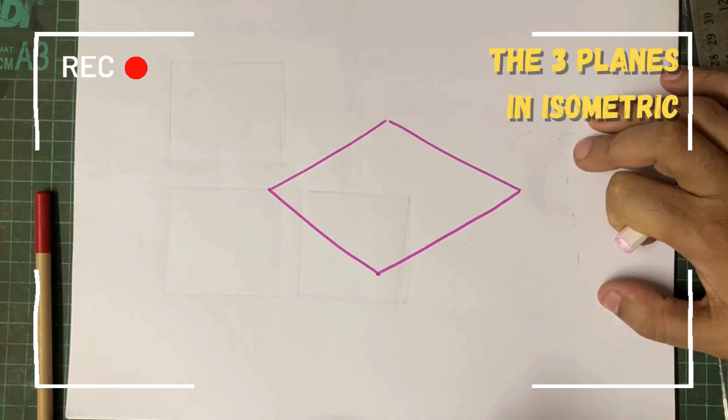But as mentioned to you in earlier stages as well, you are still seeing the faces of your product. So 2D face, 2D face, 2D face. However, as soon as you are looking at the three planes, but in isometric, what will happen is that the same thing will be shown like this. So we're going to make the top view, but we are going to make the top view like that. So anything that you're seeing, if this was the base, then that is how you're going to look at a top view.

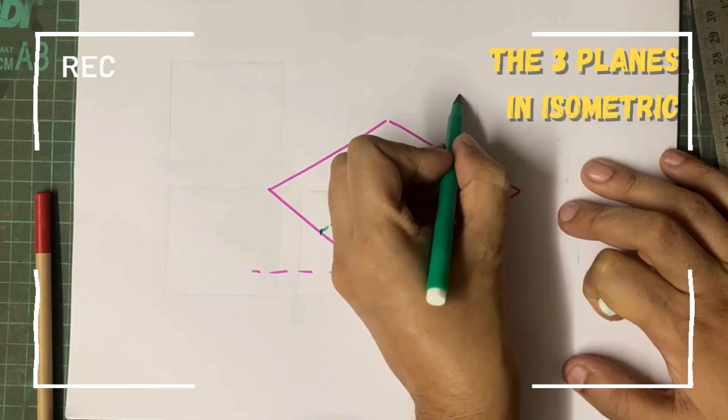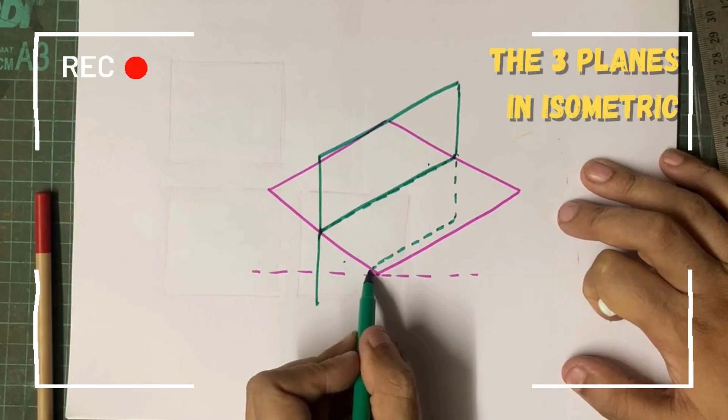So what will happen when we have to look at a side view? Now, side view means, unless specified, this is the side view, which means to look from here, I will need to make a plane which will come over, and that's actually hidden. This one won't be hidden, so let's make it like a proper line, and this will be here. So that's a side view for you.

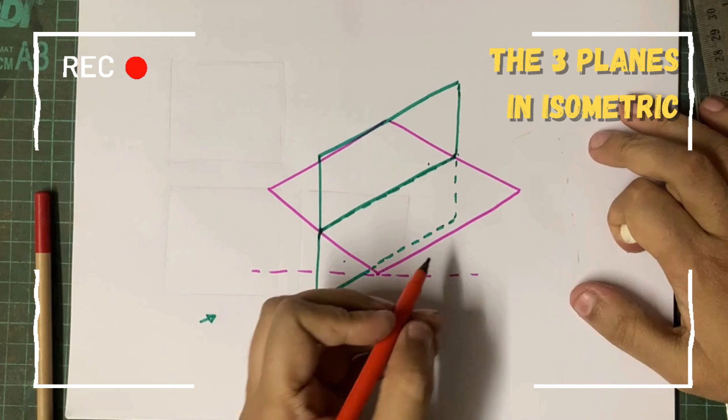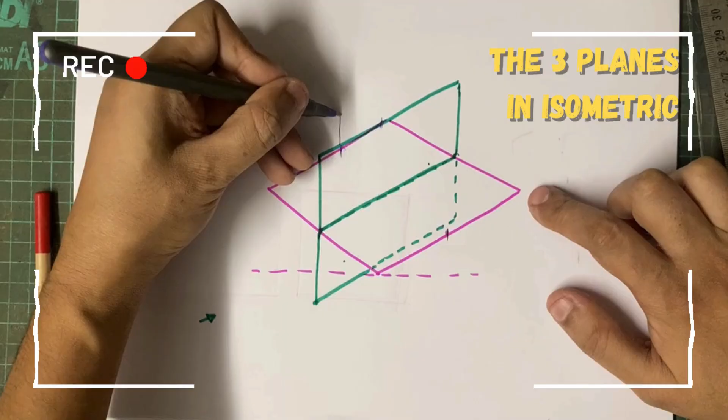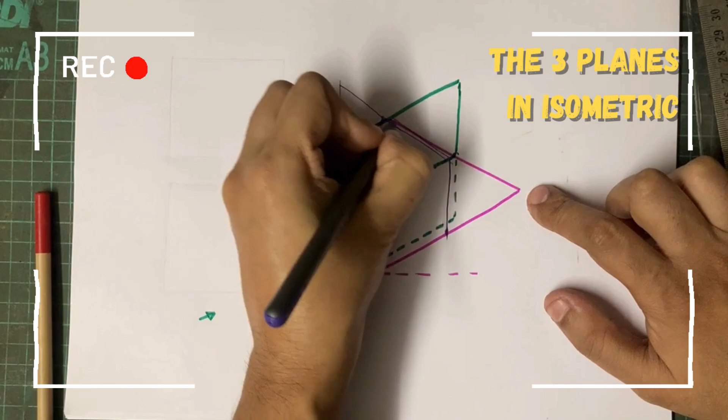Okay, so we made the top view, which was in pink. We've made the green one, which is the side view, and now left is always the front view, and for that we will use a different color sketch pen, which is not working sadly, so we will have to use something that probably is. So we have this, we have a center point here, we have a center point over there, which means this will extend. So that's how your front view will look.

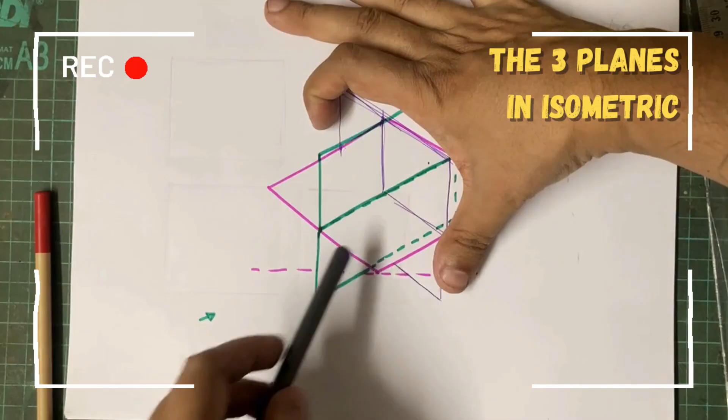So if you take a piece of paper or three pieces of paper and you interlock them as half cut joints, you will notice that one piece of paper will create a square over here. That shape is going to be for the front view. The one in green is going to show the side view for you. And if looked from the top, then you will see this square. So this is how the three planes sit together in isometric. Now looking at this, we will move forward.